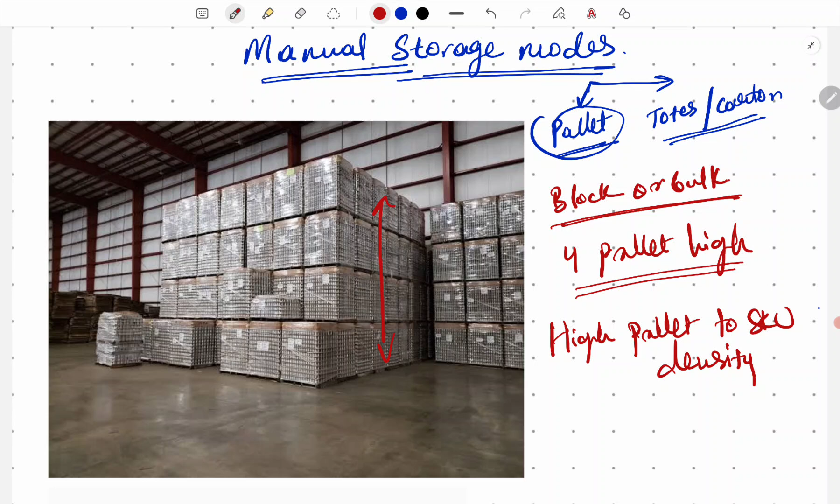Usually, we can keep up to 4 pallets high, but it totally depends on the nature of product and the stackability of the product and stability that it can provide. Usually it's stretch wrapped and uniform kind of product or SKU that are stored, preferred for high pallet to SKU density. So basically there should be a large number of pallets for a small number of SKUs.

Generally preferred for LIFO kind of situation, last in first out, because when you are putting it away in this direction, the last one that you put will be the first one that you'll pull out. So in this kind of storage, the equipment used is usually forklift, and in some cases, just because you might have space constraints, or in case you are able to go more than 8 or 10 meters high, which is very rare, you can use reach trucks.

So now this particular storage mode doesn't provide you much selectivity, and with that we'll move to the next part, that is selective pallet racks, also known as SPRS, selective pallet rack system. So the problem from the previous one is solved here. In this case, instead of stacking everything on top of each other, these are stored in the racks. Every pallet is independently accessible, so 100% accessibility. Can be FIFO or LIFO because everything is accessible.

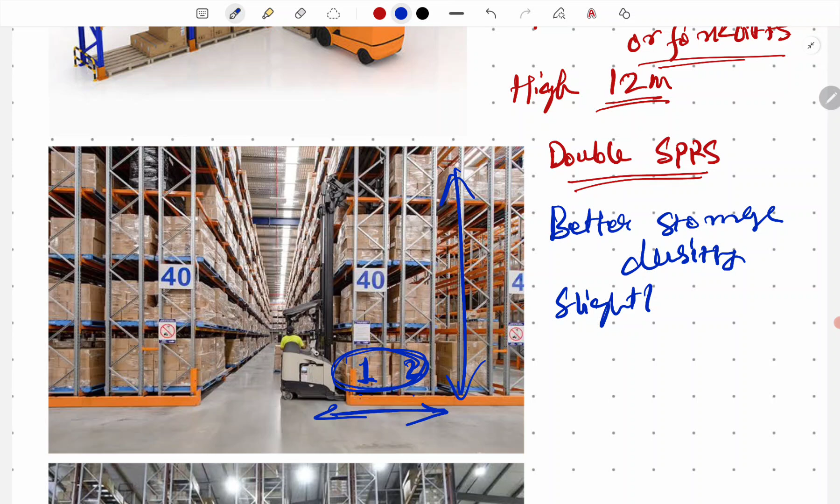The advantage it gives is better storage density, slightly compromised selectivity, but if you have a good pallet to SKU ratio that can support your double deep configuration, then it is better to use this.

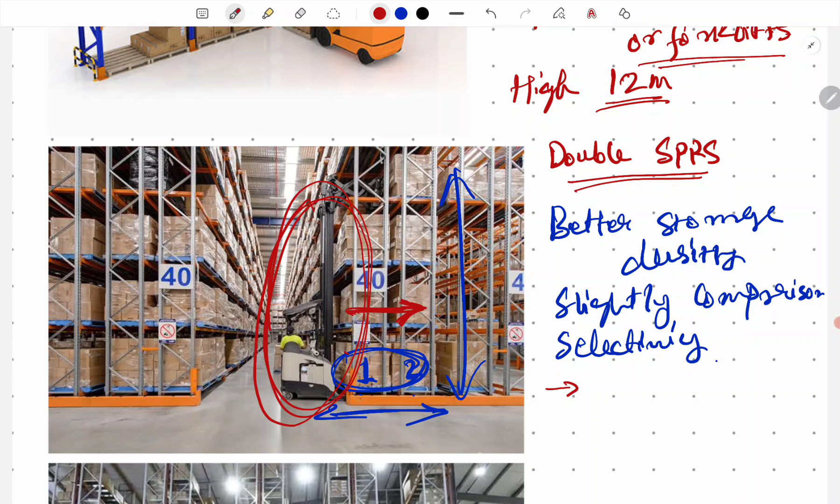The only problem here is you'll need to have a dedicated or basically specialized type of reach truck which can reach to the second deep using a pantograph kind of mechanism, which makes it slightly expensive, but overall it gives similar advantages of SPRS but with better pallet storage density.

So now you can see that we are moving from very high storage density but less selectivity. Then to solve that selectivity issue, we moved towards the SPRS, but then again we found that density is less. Then we moved to the double deep pallet kind of situation. Now in both single deep and double deep configuration, the problem was with height. There was limited height, which was limited to around 12 to 13 meters.

Now, to solve this kind of scenario, very narrow aisle or VNA kind of racks were introduced. It is similar to your SPRS. The only difference is it can go up to 14 to 18 meters with specialized reach trucks known as VNA trucks. Now these trucks can be man up or man down. In man up trucks, the person will go up with the forks because the height is so high, it becomes difficult for the operator to get the topmost pallet, or basically to increase the visibility.

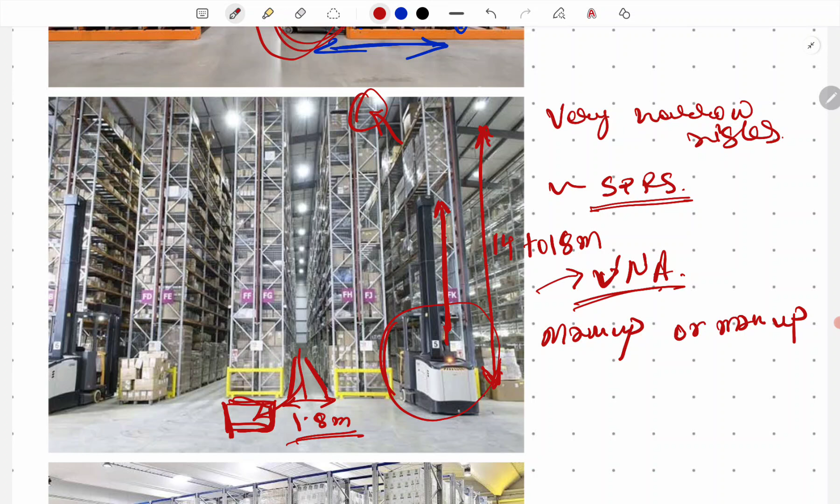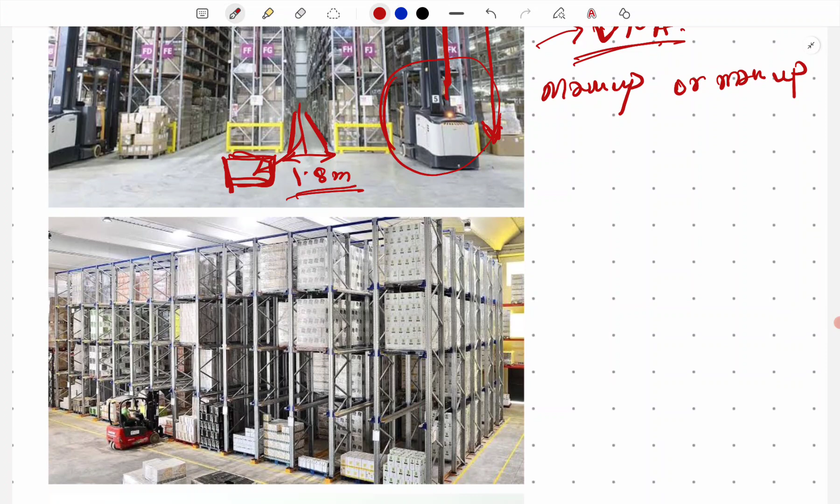Now we have seen that we have solved almost all of the problems, but still the storage density is less. In this case, we are moving towards drive-in and drive-through racks.

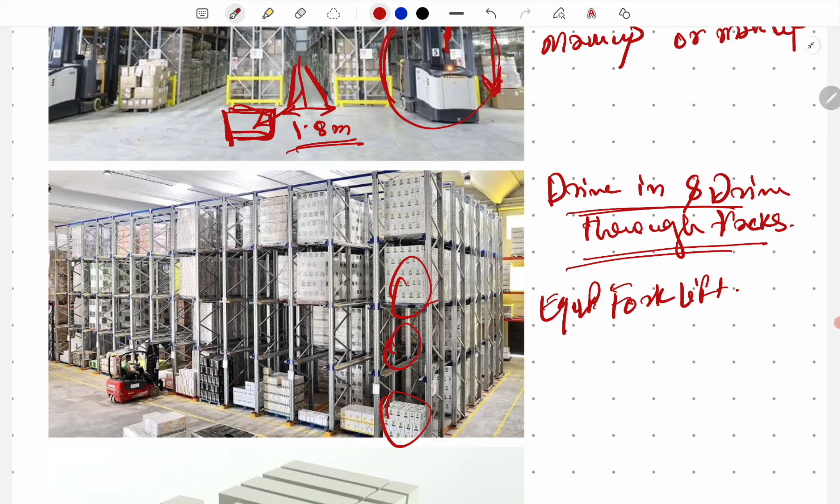So these racks kind of provide the combination of bulk storage as well as pallet rack storage. So these are the drive-in racks. Equipment used is usually forklift. The advantage here is pallets are kept on the rack, but they are also in depth. And how these pallets in the depth are accessed is through forklift, which goes inside the rack. It will pick whatever is required and it will come back.

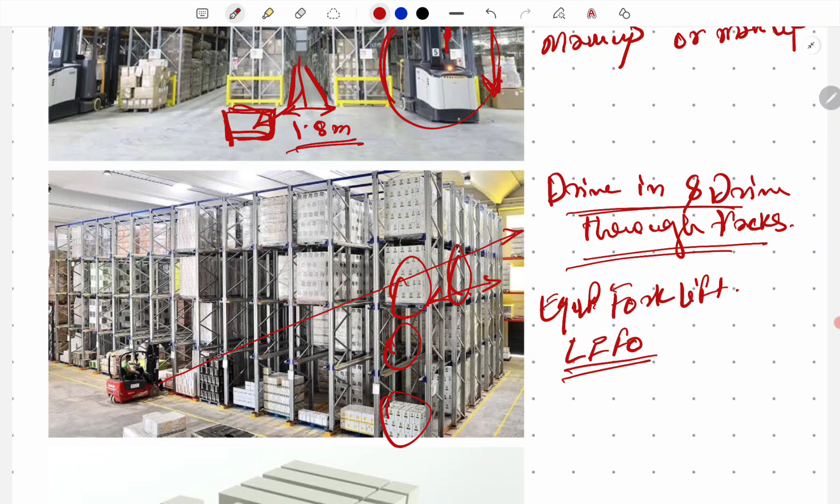So this is also similar to a LIFO situation. If the forklift is going inside and getting the pallet and coming back, then it becomes drive-in. But in case the forklift goes inside and comes out from the other direction, it becomes drive-through. This can also go up to 8 meters high. Usually this is the maximum reach of a forklift, and it is more suitable in a scenario where we need higher storage density. I'm sorry, it will be higher pallet to SKU ratio. So more number of pallets for the same SKU.

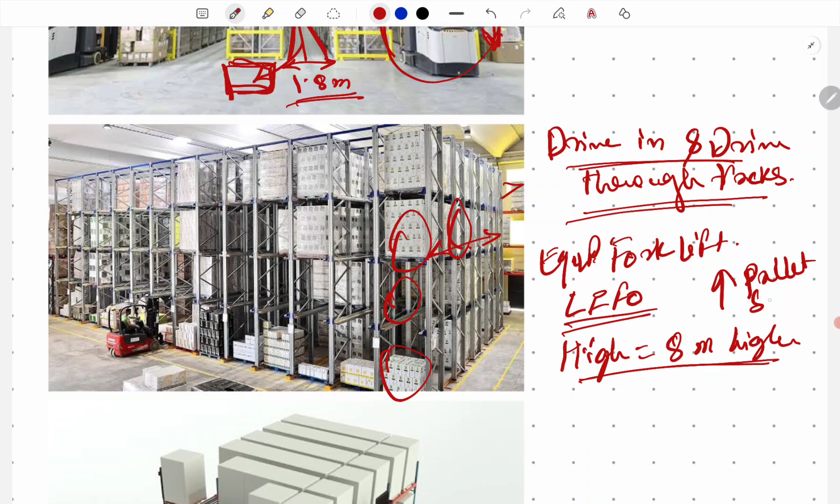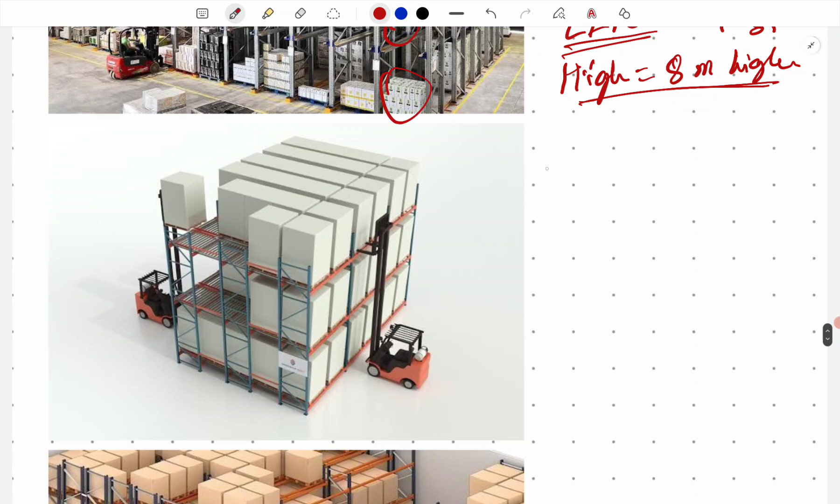Now moving ahead, since we are trying to make it as dense and as deep as possible, the next ones are continuous flow racks or pushback racks. The same image can help, but there are slight variations. Let's assume this is a continuous flow rack. In a continuous flow rack situation, the pallets will be put away on the higher side, and these pallets will flow towards the other direction, from where the pallets will be picked. So these are suitable for a FIFO kind of situation. Racks are slightly costly because there will be channels and tracks on the racks with some mechanism to stop the pallets. And it will also go around 8 to 10 meters depending on the equipment that you are using.

Another configuration in the same is pushback racks. Now imagine instead of putting on the higher side, the reach truck or forklift will push the pallet from the lower side. So this is the slope, and the forklift or reach truck will push the pallet. So now pushback becomes a LIFO kind of situation. Depending on what kind of situation you want, we can use either continuous flow racks or pushback racks. Pushback racks typically go around 3 to 4 deep, not more than that.

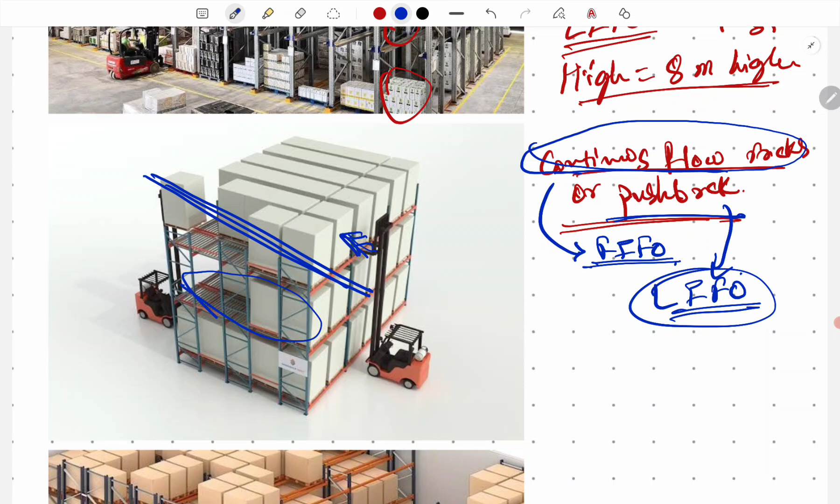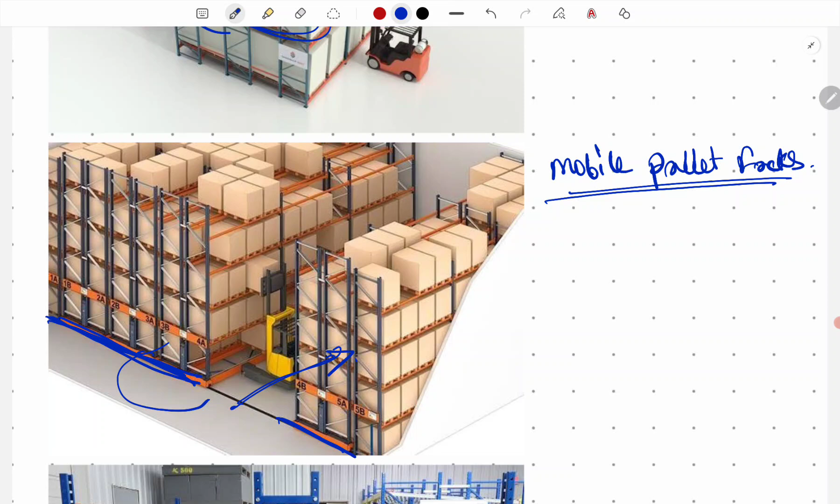Now moving ahead, we have mobile pallet racks. This is the most dense form of pallet racks, because in this situation you can see there are multiple racks, but only one aisle. But how will we access the pallets in here, right? As the name suggests, the whole rack will move, creating an aisle space here. So basically we are shifting this aisle to here and moving these racks to here. That's why the name mobile pallet rack.

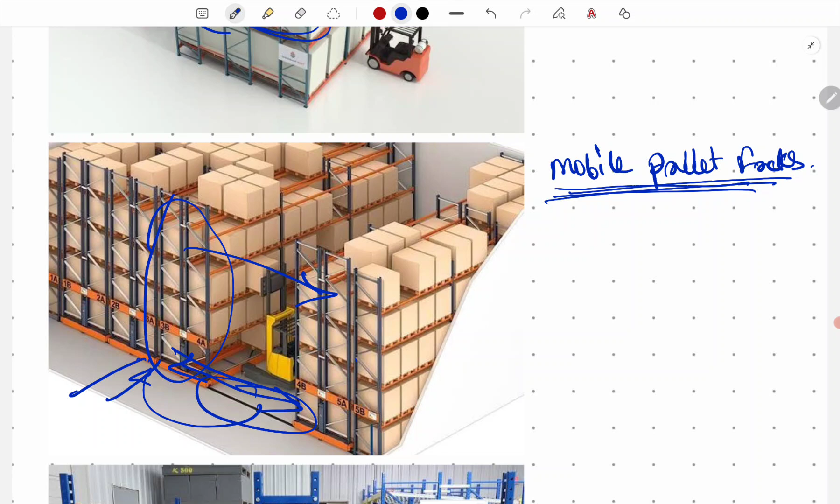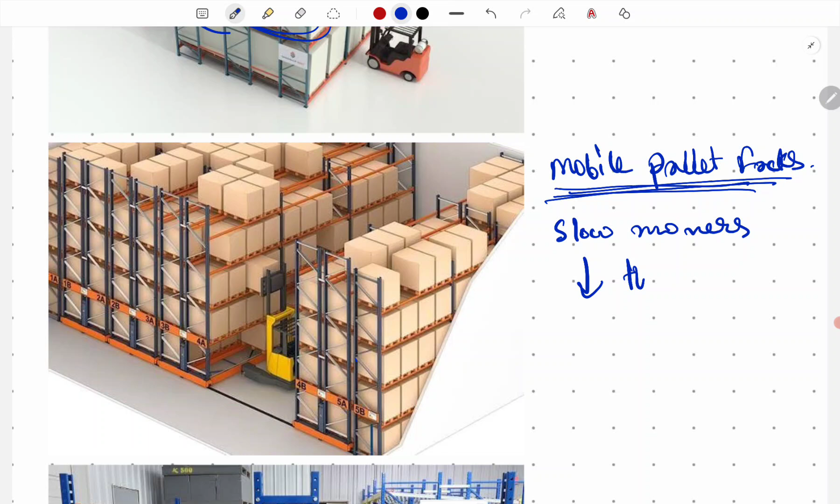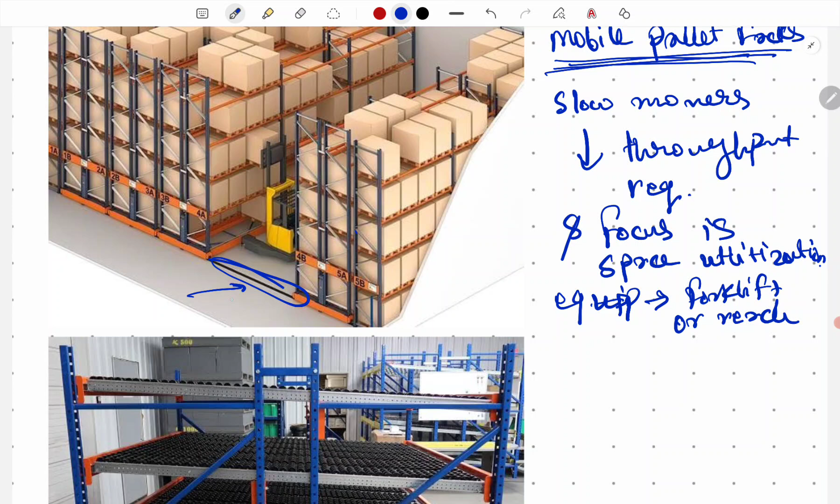This particular rack is used where we have slow movers, low throughput requirement, and the focus is space utilization. All the other properties are the same as SPRS, and equipment used will be forklift or reach truck. Obviously, the cost of the racks will be higher because there will be mechanization moving the racks from one position to another, and it is done through tracks, which you can see here. Now, these were all the equipment used for pallets.

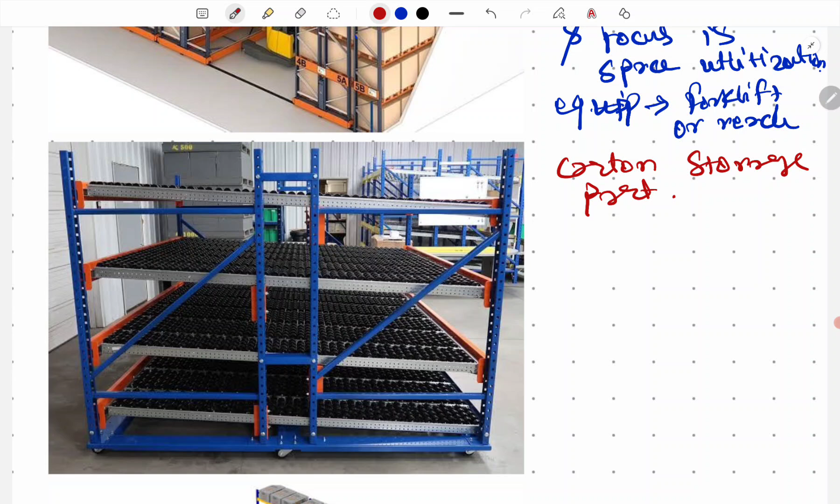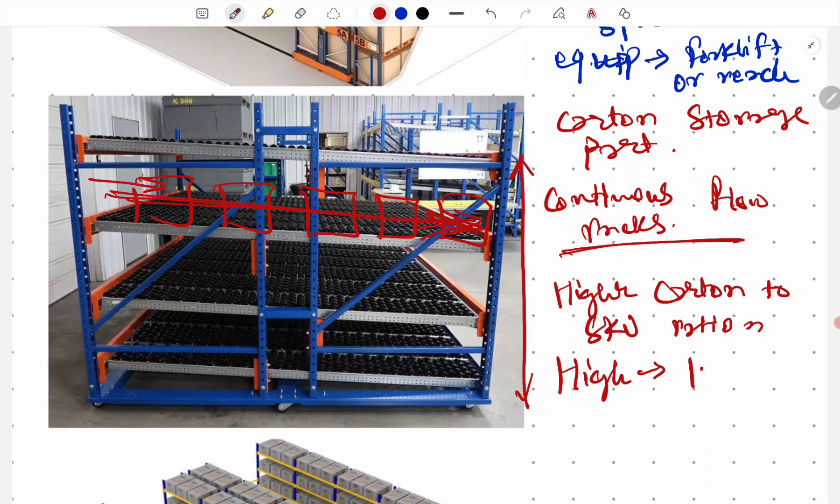Now we'll move towards the carton storage part, where the first one is continuous flow racks. Generally used for keeping cartons, where cartons are put away from the higher side, and with the help of gravity they'll flow to the other side. So similar to continuous flow racks for pallets, we'll need a higher carton to SKU ratio. Height is generally limited by a person's reach, so let's assume it as 1.8 meters. Typical use cases are in the forward pick area, and what else?

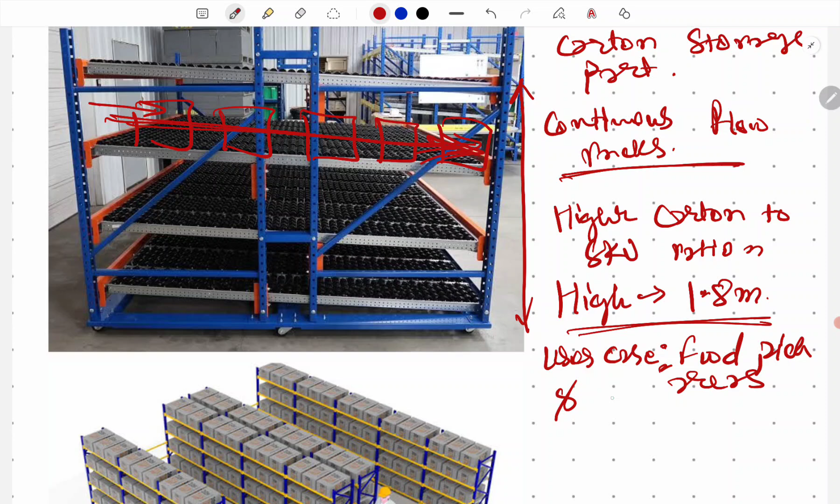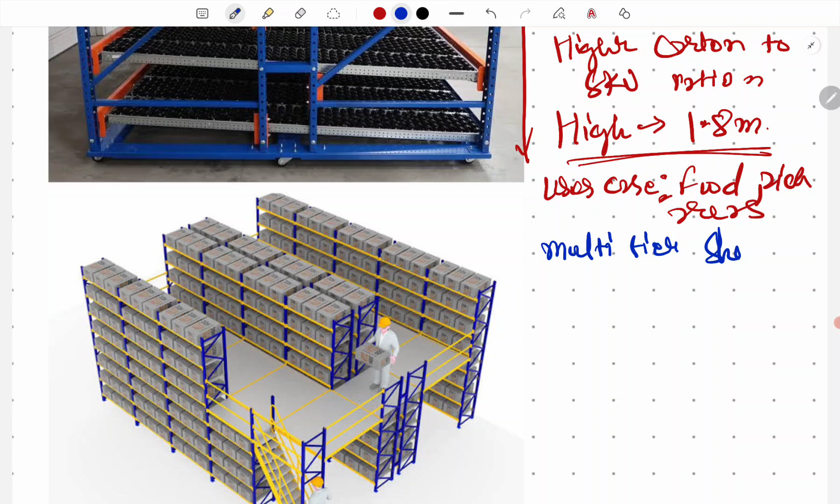The next one in carton storage is multi-tier shelving. These are simple shelves as you can see in the image, but there will be multiple tiers. In this image you can see tier 1, tier 2. It can typically go around 4 to 6 tiers depending on the height of the warehouse. One tier or one level has storage capacity of around 1.8 meters, and clear height can go up to 2.5 meters due to requirements for lighting and all.

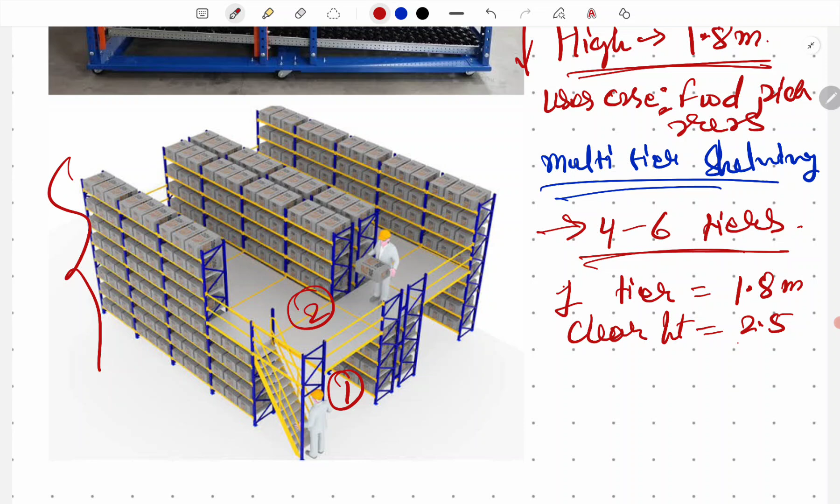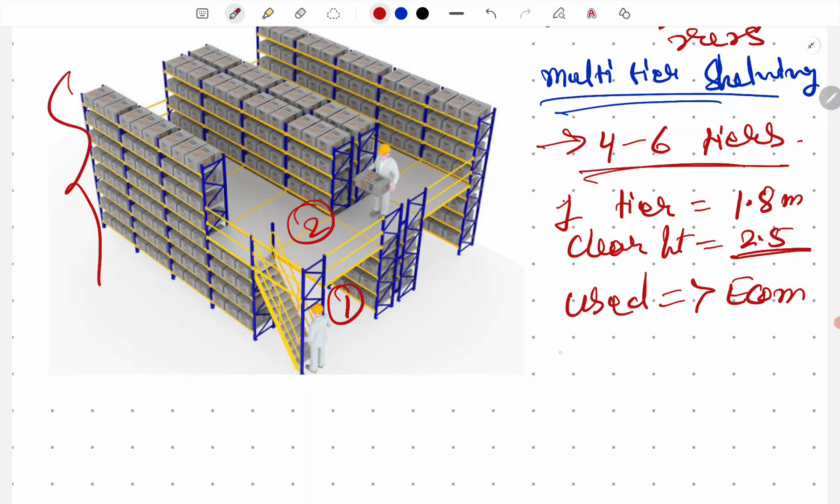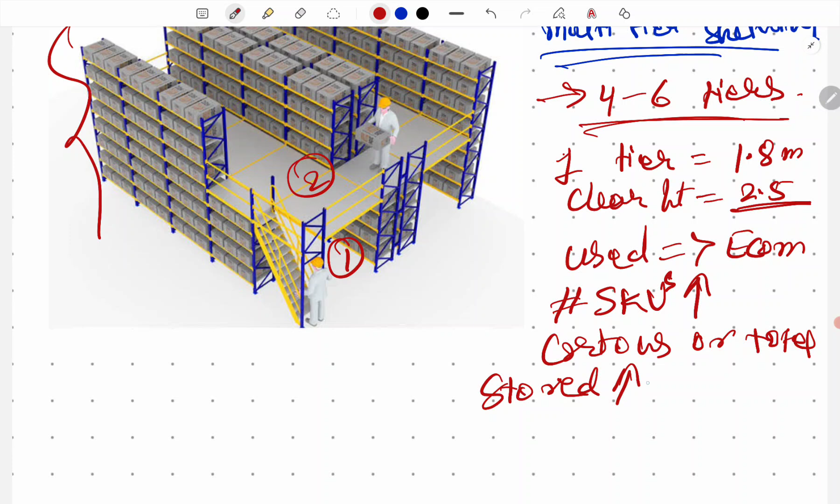It is typically used in e-commerce, where the number of SKUs is very high, and cartons or totes stored is also very high. You can either do each picking or case picking from this location, as the image is showing. A person can walk on every level. He can drag trolleys or any cart to pick the eaches or cartons as required. So this is the manual but dense kind of storage for cartons.

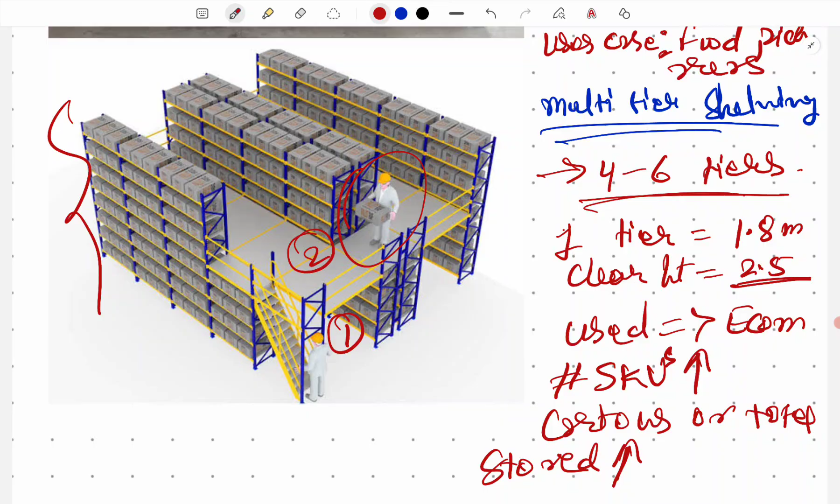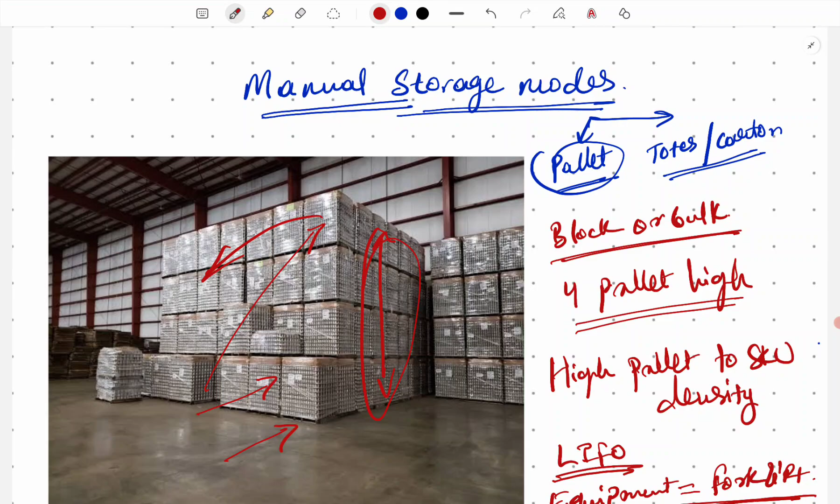So these were all the manual storage modes. In the next video, we'll discuss the automated storage modes, which will move us towards the goods-to-person kind of scenario. And if that is the goods-to-person scenario, then all the manual storage racks we can call person-to-goods scenarios.